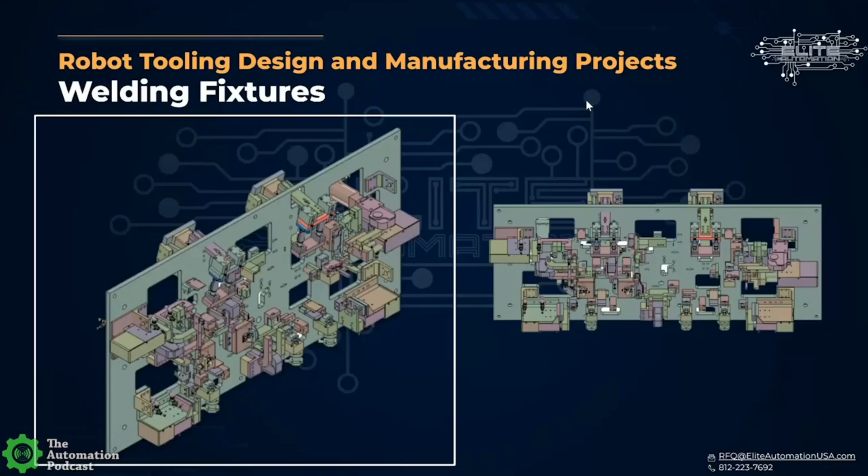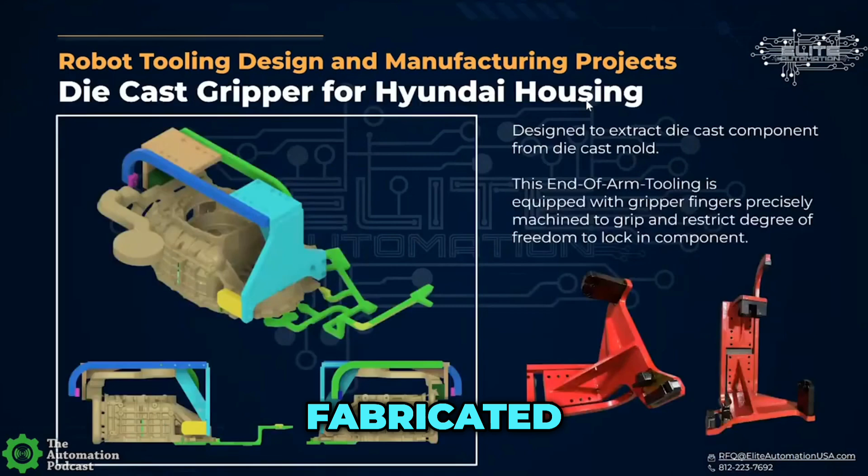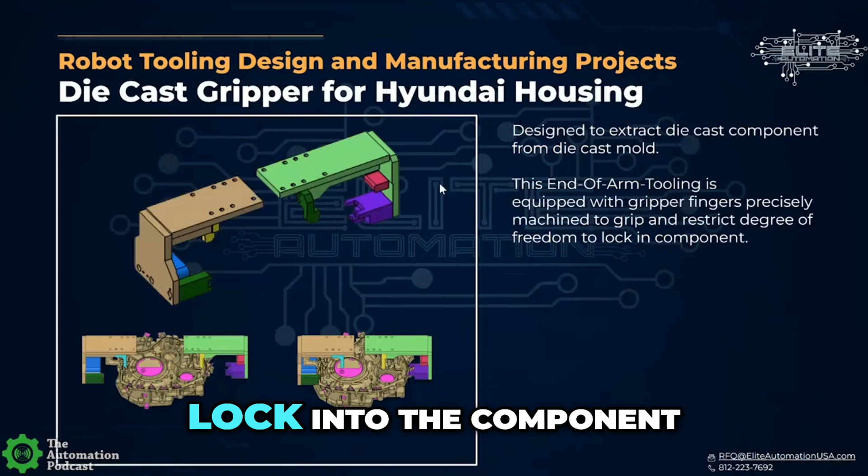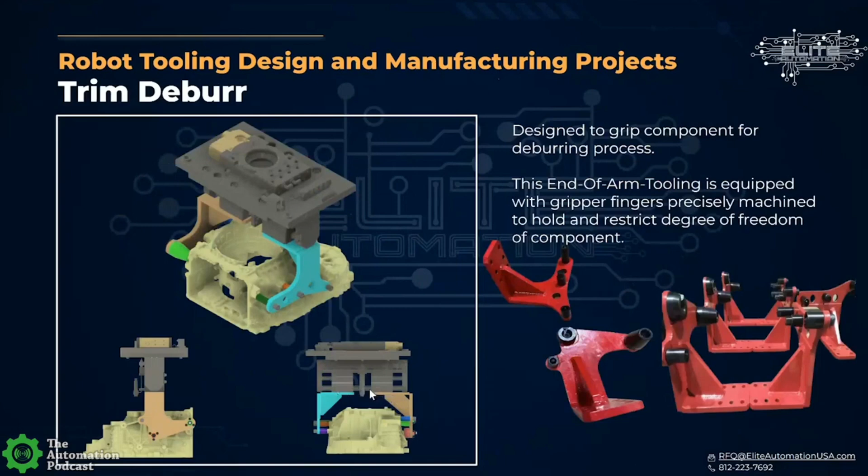It's actually a three-step process. So we have to load in a bearing. We have to overmold on top of that bearing, and then we have to pick the overmolded part out and take it to another injection molding press to overmold it for a second time.

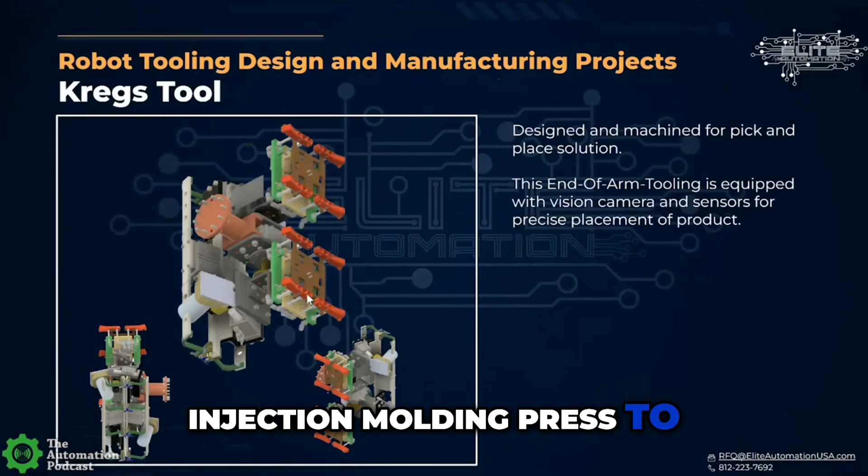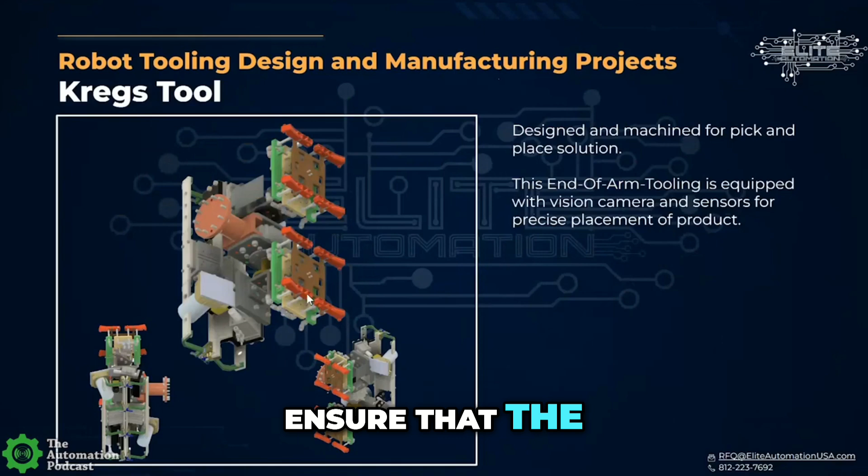Oh, all right. Yeah, that one was pretty intricate, and it's using vision and lasers to ensure that the mold open position is in the proper open position to ensure the robot doesn't crash into the die.